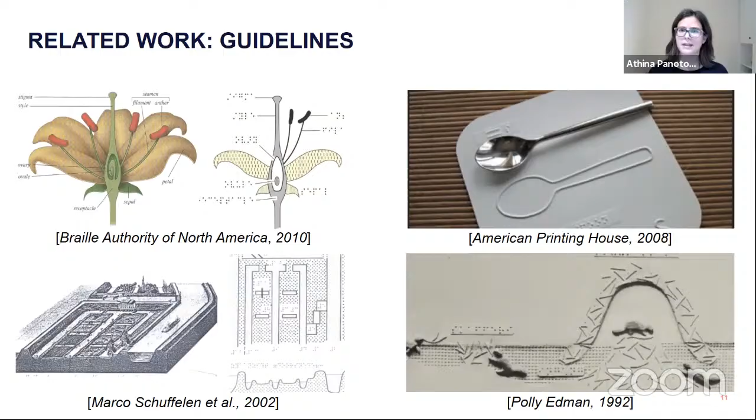So just to give you an idea, one of these documents is published by the Braille Authority of North America, or BANA, and we used it to design the baseline images for our test study. And here you see an example of the image designed following BANA guidelines. So the left is the original image and the right is the corresponding tactile illustration. And I will discuss 2 elements that are different between BANA and our design.

So first, BANA suggests the use of semantic uniform texture. So one semantic area, the sepals, have one texture, while the petals have a different texture. In contrast to that, we indicate geometry with textures. Second, BANA suggests the use of one or more images taken from canonical viewpoints.

This image is a canonical cross view, while the original image is a non-canonical view. So in this case, the eye level is not at the same level as the object level. In contrast to this, we design a single image which is a combination of multiple canonical views. And this is called multi-projection rendering.

So closing the background material, I want to clarify that we present a semi-automatic way for a new design of tactile images made of laser-cut microcapsule paper and a user study that tests these images in terms of shape understanding. So first we ran 2 formative studies.

With the first one, we tried to identify important information on shapes for the blind, while with the second, which I will discuss now, we identified common misconceptions on current illustration design. We gave 3D printed objects to 7 participants and 3 variations of illustrations. The first variation was taken from non-canonical or 3/4 views, the second one from canonicals, while in the third one, texture was added. And after that, we asked participants questions about the shape. For example, how many pieces has the back of the chair?

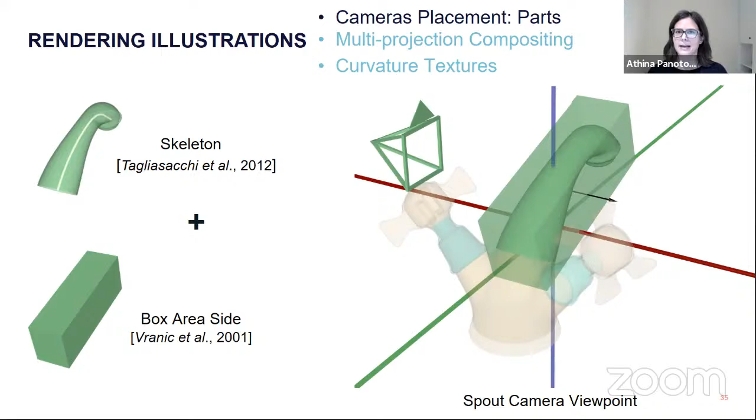The next step places the rest of the cameras, called part cameras, because each camera renders a single part. Here we have 6 part cameras, 6 parts. I will focus on the spout. From the user studies, we know that canonical views of large surface area are preferable. So we take into consideration the skeleton and the surface area of the canonical face of the bounding box. And this gives us the image here. We repeat the same process for all cameras. And this is the camera placement for the faucet. You see on the corresponding canonical views that the parts are displayed clearly.

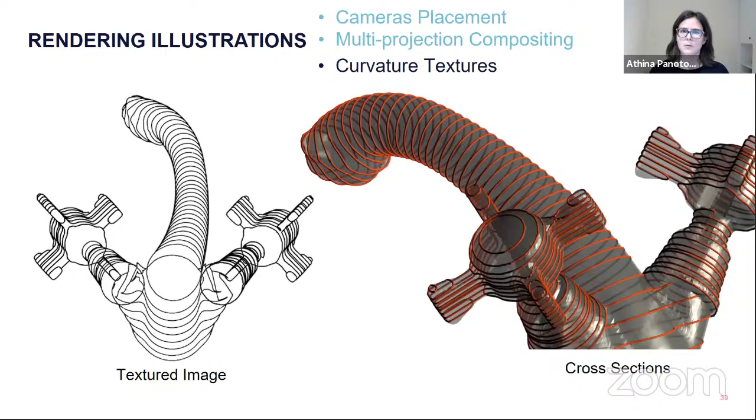We then align the views with the master camera, following the information from the master camera, and we combine all the images together in a multi-projection drawing that you see on the right. From the studies again, we found that curvature could be indicated with lines. So we create a curvature-based texture from extracted cross-sections of the shape. And you see the textures here. So we extract for each part a texture, and after we post-process the image to make it more easily perceptible, following BANA guidelines. Then we test our design.

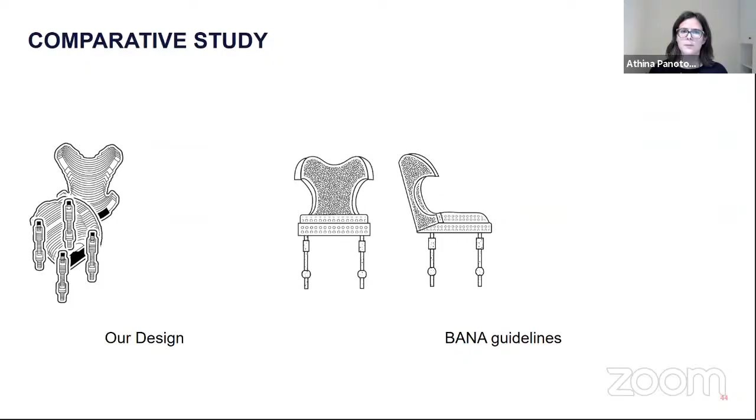We then repeat the same thing for all objects, and we consider the answer correct when the participant chooses the correct object. And after, we repeat the same exact process with the other type of images, the baseline images following BANA guidelines.

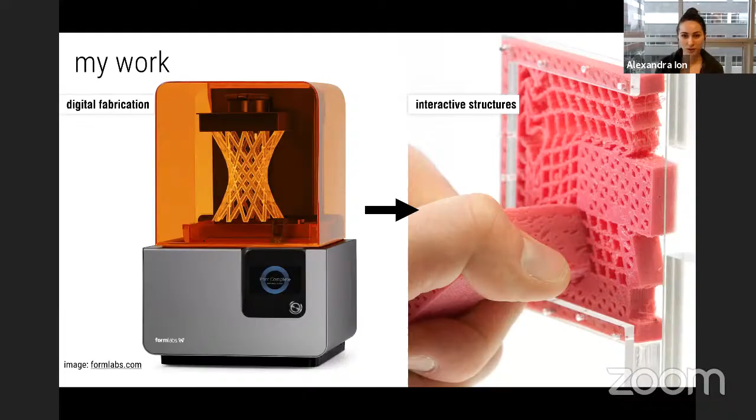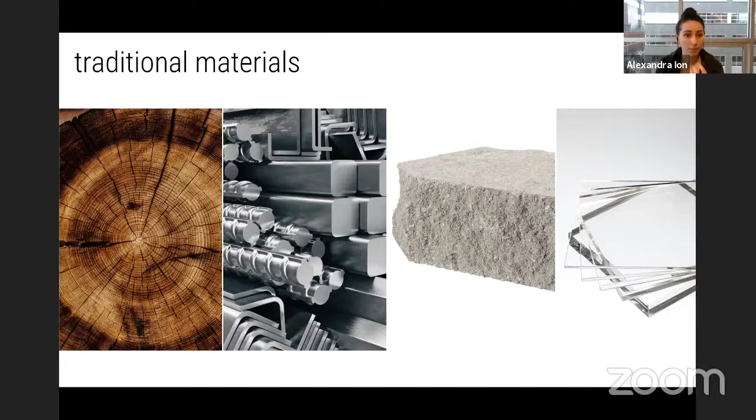So why do we do that? If you think of traditional materials, you can think of wood or metals, stones, glass, whatever. Mostly you use the materials to build something, you assemble things, they're structural. Now, if you want to have a little more functionality, you might think of starting to composite things together, like glue soft materials on top of rigid materials for safety in this example.

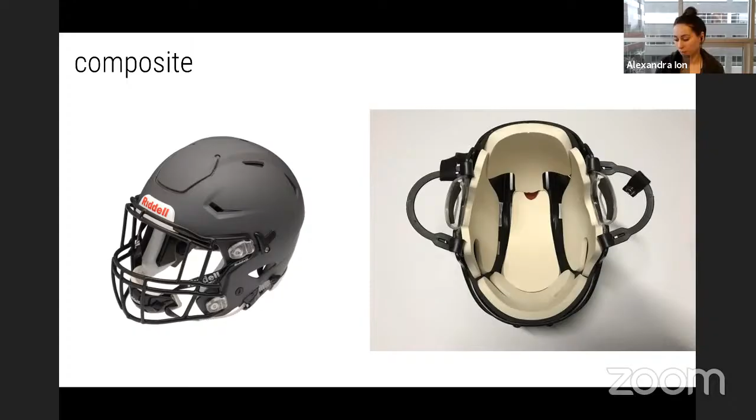Now, if you zoom into those very common materials that every one of us knows, right? Rubber foam, it's very common. If you really look very closely, you can also see it just with your eyes. You see that there's this open cell structure, which comes from air enclosures, just as the manufacturing process of these materials. But what you can think of is that these are a lot of beams that are

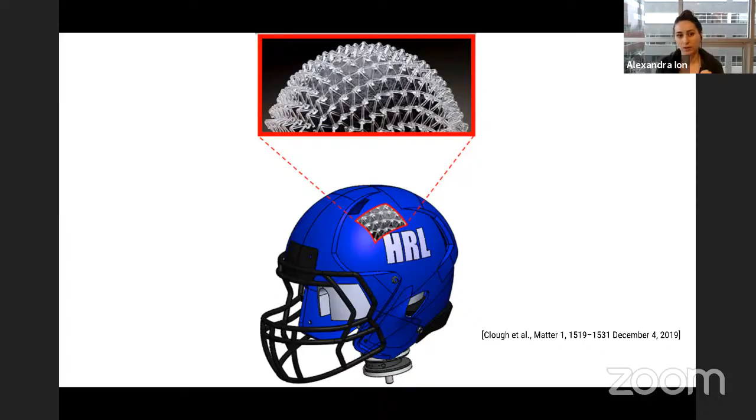This lattice assembly is very structured, very intentional in how these beams are oriented in order to provide better safety and better shock absorption. Now, taking this concept, you can go way further. You can create materials that are ultra lightweight, as you see in the dandelion example, that are noise canceling just by changing their geometry, that are light absorbing.

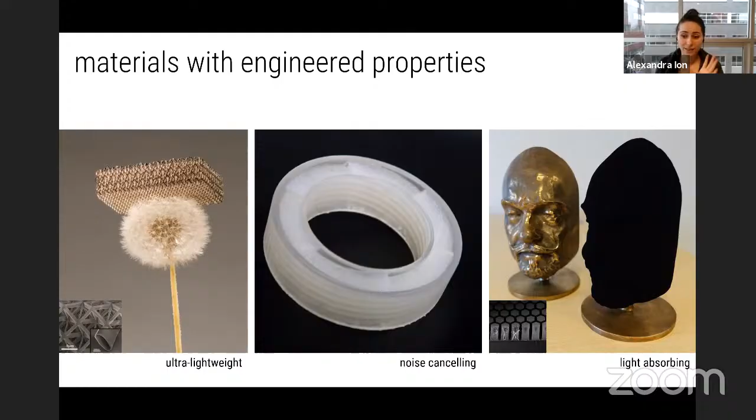And this paint is called Vantablack. Some of you might have seen this video, but I find it so fascinating that just by manipulating the structure of the material, it absorbs almost 100% of light. I believe it's 99.7%. So I find this very captivating. And the unifying theme here really is that all of this is made possible by carefully arranging the structure, so the geometry of the materials.

Now, there's also really interesting and fantastic work, for example, by Christian Schumacher, where they looked at optimizing for localized elasticity throughout 3D objects, or even looked at manipulating the directional stiffness by creating the geometry that achieves that. So there are also a lot of more interesting examples. So if you see this material, for example,

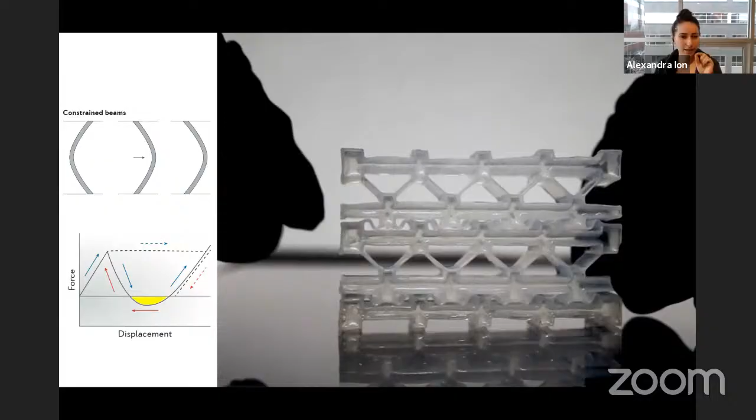the egg on the right breaks, but the one on the left doesn't. And that again is enabled by the structure of this material. So essentially what you have here is a bistable structure that flips over to its second state. And then as it goes into the second state, there is a little area that people call negative stiffness, and that area traps energy. And this energy is absorbed from the falling egg, which is why it doesn't break.

So all of these examples that I just showed you, well, I started with the broader range of metamaterials, but we will focus on mechanical metamaterials, which are artificial structures with unusual properties that originate in their geometry rather than in the material that they're made of. Now, this is also true for other types of metamaterials like optical metamaterials or electromagnetic metamaterials, but we'll focus on the mechanical ones for the sake of this talk.

Now, one thing that you might also have noticed is that most of these materials were really treated as materials. Traditionally, materials have been understood as materials. And what I think makes my work a little bit different is that I really think of them as devices. What can these structures offer us in terms of adding functionality, not changing the material properties per se?

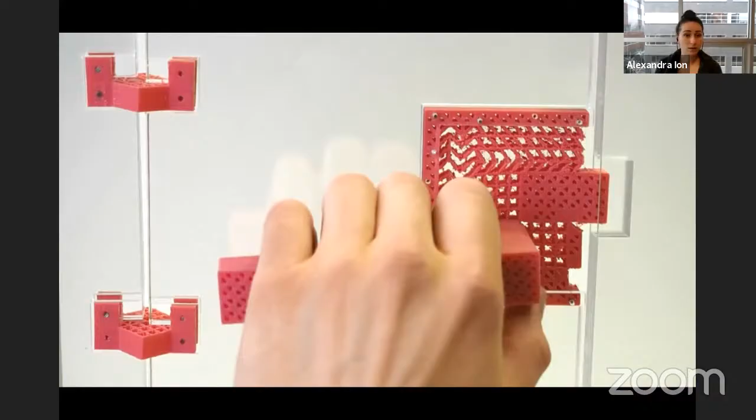So the first thing that we looked at was processing analog information, which you can think of as something that transforms the input into something else. Mechanisms do exactly that. They transform the input into some other set of output forces or movement. So you see in this door latch example that as the user is pushing down the handle, it creates a rotation which causes these cells to shear, and they move the latch inwards. And that is how this whole mechanism works.

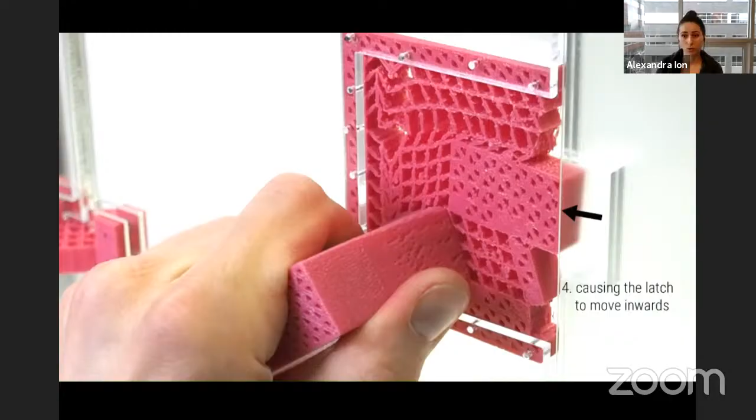So essentially, we have a grid of cells, and each of those cells, this is the vocabulary that we defined for this project, can have this topology. Rigid cells do have diagonals, whereas shearing cells don't. And this combination allows for a very controlled directional movement.

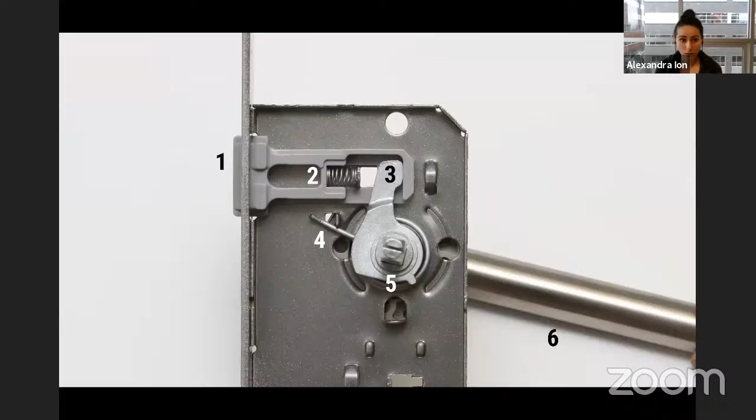So this is how a traditional door latch looks. What I want to point out is that it consists of a lot of different parts, including springs, which are kind of tough to assemble.

Now, one of the main benefits of our approach in this case is that it only consists of one piece, which means that there's no assembly, and because there's no assembly, you can create this as a part of a larger structure. You could print the entire door, including the door latch, for example.

The second obvious benefit is that in mechanism design, essentially you have the design phase, which is also very tricky, and then you have the craft phase where you have to assemble everything. That craft phase is offloaded to the 3D printer in this case.

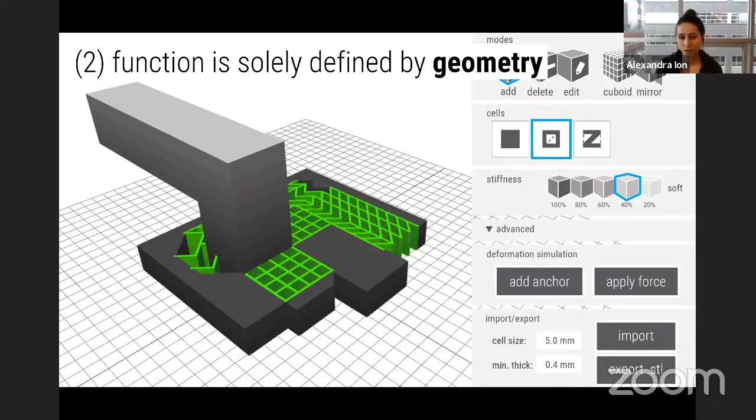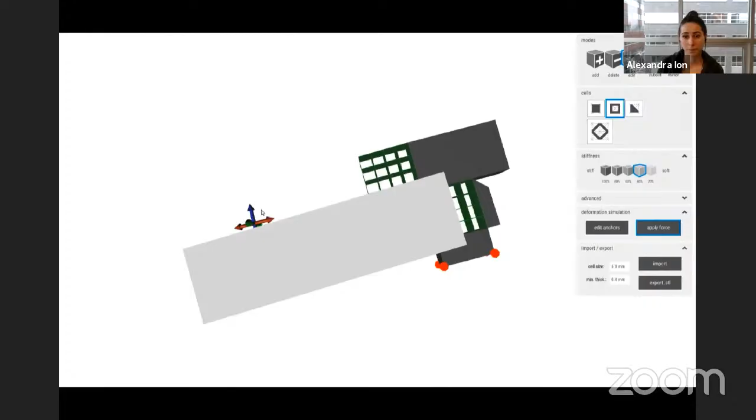For the design phase, we can assist users by creating very easy to access online design tools where users have simple interactions and can do a tight design loop by also simulating their designs to see if they met their objectives. While most of the examples that I showed so far are 2D or 2.5D, there's no reason for not going 3D. Our editor actually fully supports that.

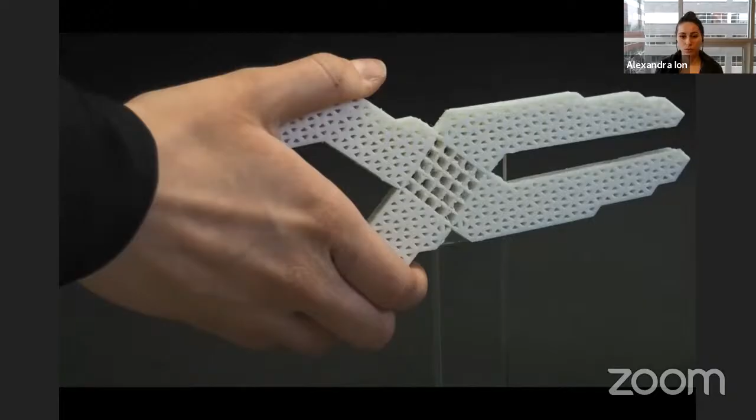Now, what else can we do than door latches? Here you can see pliers that are strong enough to lift things or tighten screws or things like that.

This is actually my favorite example because it's somewhat unclear what it is. It's like a strip of material with some strange structure. But what it does is that it's kind of a copy machine, if you will. There are two pencils embedded, and the pencil in the middle scales down your drawing as you draw.

And lastly, we also created this prototype of a Jansen walker to showcase that you can create robotic movement out of one piece with these types of structures.

All right. Now we've seen a couple of applications, and applications means that you don't only have the structures, but the whole embedding: there's a door around it, it serves some purpose. But if we take all of that away and just focus on the essence of what these mechanisms actually are, they are transformations.

So we only look at the motion paths, from where the input is, where the user pushes down the handle, to where the output is, in this case the latch moving inwards. Now, it turns out that even though the vocabulary is very simple, essentially a quadratic cell that either has a diagonal or not, the design is still somewhat hard.

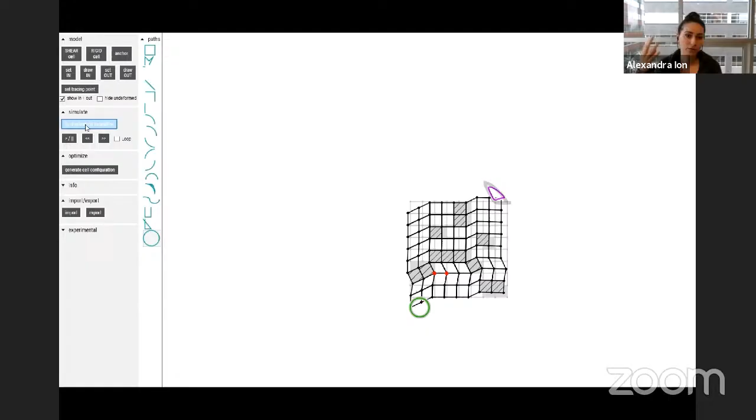That is why we created an inverse design tool where users specify the grid size and the movement, and draw a custom movement. Our algorithm then returns the cell assignment that best approximates the transformation of the one motion path into the other motion path.

What the algorithm does here essentially is take as input the grid size and the paths that the user defined. Then we analytically define some anchors out of the set of vertices that we have. What we actually optimize for is the assignment of either a shearing cell or a rigid cell that best minimizes the distances between the user-defined paths and the paths that result from the current cell assignment of the current mechanism.

Now, you might have noticed that we are still talking about these very distinct cell types, a rigid cell or a shearing cell. Because we have this binary assignment of cells, we have a very large search space, and we are bound to combinatorial optimization. So the question is, how can we best model this design space to find out what is meaningful to look at?

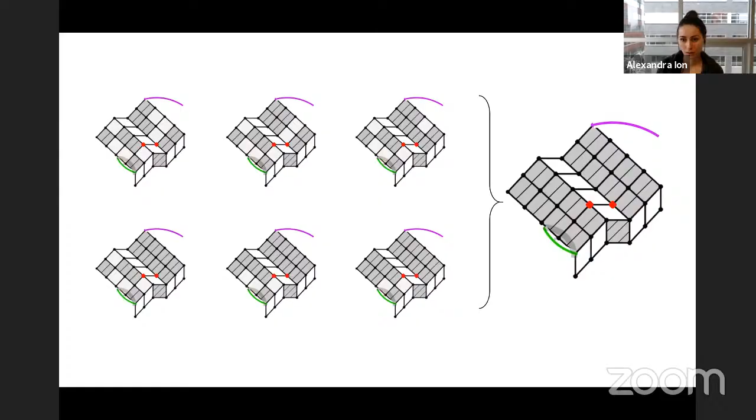I would like to state right away that not all of the possible cell assignments are meaningful, because all of these examples, if you look at the transformations between the paths, implement the same transformations, and thereby are the same mechanism.

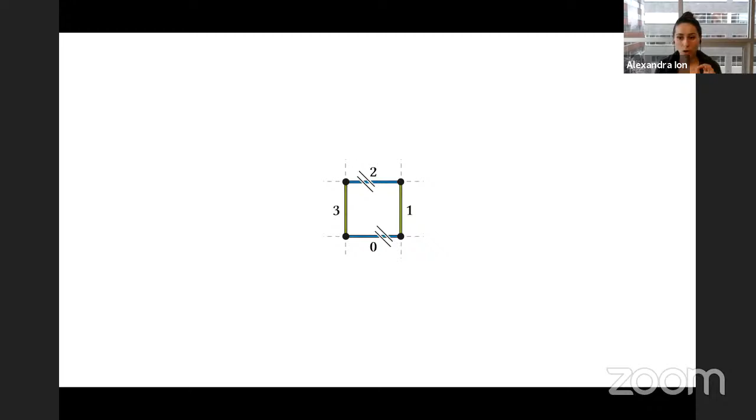So knowing that, we can move forward, and this is kind of like the search space reduction that we were looking at. We identify these distinct mechanisms by modeling the structural constraints. So we create a constraint graph. Looking at just a single cell, we know that in the shearing cells, the opposing members always stay parallel. And so we model that in the graph, where the arc is the parallelism constraint and the nodes in the graph are the edges in the cell.

And so you see that we get two connected components for just one single cell, which models the different degrees of freedom that this cell has. Whereas if we look at the rigid cell, it has exactly the same constraints. So the opposing members still remain parallel, but additionally the angles of adjacent edges can't change.

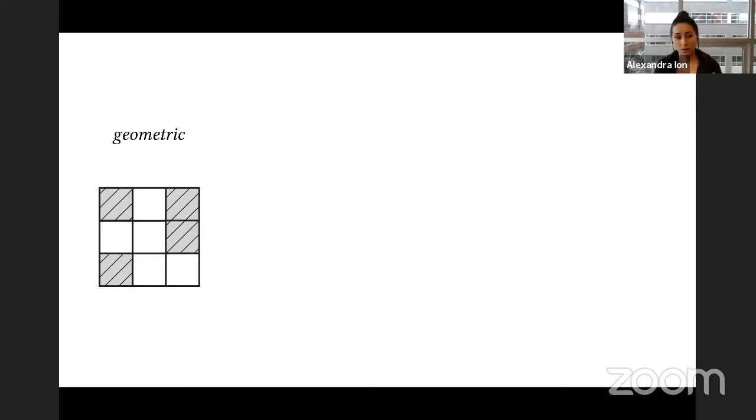So essentially, before we go into the optimization, we convert the cell assignments that we have from the geometric space into this constraint graph, by just propagating the constraints throughout the graph. And here we already see something interesting: these blue highlighted cells are in the same connected component, which means that they are really constrained by their neighbors. In theory they would be allowed to change their angle, but they cannot because the neighbors prevent them from that. And so we know that these two cell assignments are really the same mechanism.

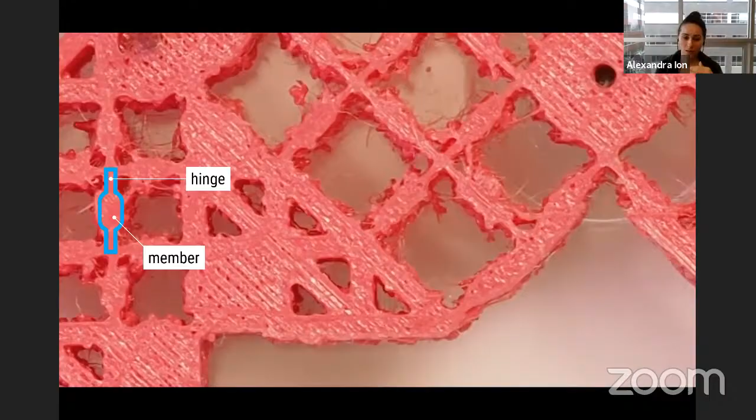Now, this thickness ratio gives us a stiffness ratio, because even though the member is thicker, as it pushes the next cell over, it will still deform a little bit, and that is where this decay comes from. Now, if we just double this thickness ratio, which we could do by essentially throwing technology at the problem.

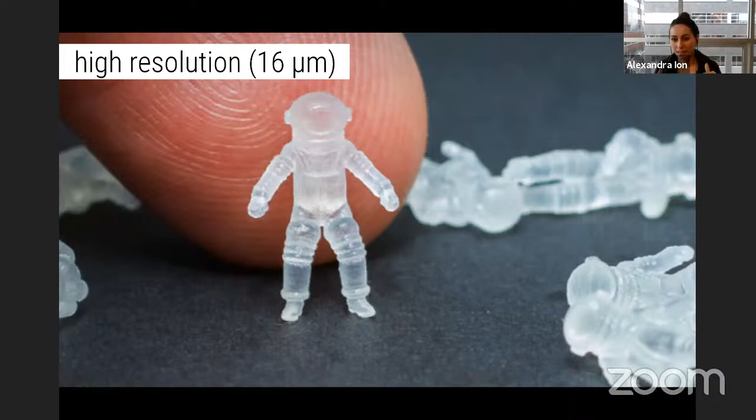So using higher resolution printers or multi-material printers, where the corners could be soft and the members could be rigid material, that would already give us a pretty good stiffness ratio. Just doubling the thickness ratio, we would get a stiffness ratio of 64:1. Thereby, we can concatenate more cells and create more complex machines.

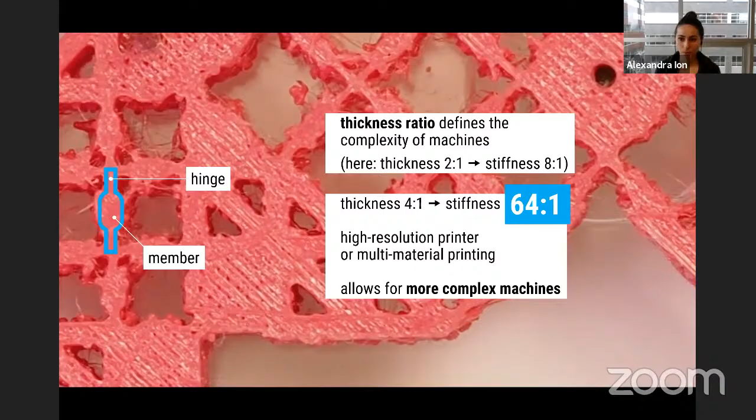However, even though 64:1 might sound really good, you just cannot get rid of this decay ever. That is just how analog machines work. So obviously, the next logical step is going from analog to digital, because there you don't have this problem of signal decay. To explore the space of what digital materials would look like, we created these other types of cells, which contain bistable springs, similar to the ones that you've seen in this egg example.

So they do have two stable states, this one and then this one that they're printed in. As you push in the leftmost cell, that snaps through to the other side and releases its own energy that it had stored. Remember the egg? The energy that it absorbed from the egg is stored in the spring. So it releases the energy, pushes the next cell, that also releases its own energy, which pushes the next cell, and so on.

And because at each and every one of these steps you do have energy stored, you don't have energy decay, because they are just triggered, but the force is not propagated. They're just triggered, and then they release their own energy. So here it is in real time, where you see how this signal progresses through the whole cells in this case.

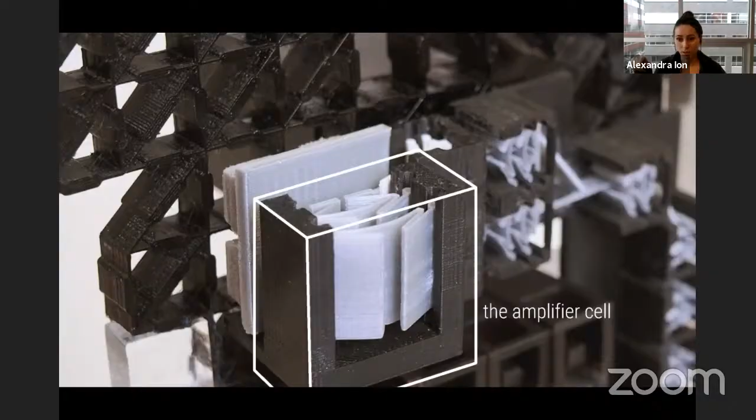And to embed this in some sort of usage scenario, we created this little lock where the user inputs a code at the beginning, and only if that's correct will the signal traverse to the very top, where it retracts those bolts that were blocking the door from opening. So you see that we already combined the mechanism part with the digital parts into one example here.

So there are different things that you can do, like route the signal. Obviously, you will need that, but then also create gates. And we did model all of the important gates, most importantly the NAND gate. So we cover combinational logic, and it's also time-independent logic, which makes the current scope of this project a combinational circuit.

Obviously, for the future, you would like to move up to sequential circuits, where you would want to have a clock signal. This is still a limitation in the current state of this project. And while there are also other people working on this type of mechanical computation in the meantime, there's still this problem of how you reset the springs back to their charged position where they store that energy, so you can do another computation step or configuration step, depending on how you want to use this.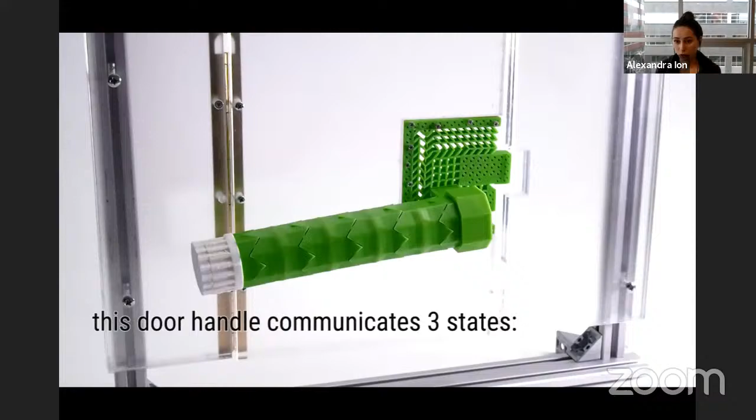So one way we approach this is looking at them as textures, where this door handle has multiple textures integrated into its structure, so it can communicate states like, well, I'm available, or as you move forward, you could be busy, or spiky means, please really do not enter, I have something super urgent to do.

And how we achieve that is that a global force folds all of these cells, but there's a defined sequence to them. So first you can set it to go into this rippled state, which means, well, I'm kind of busy, but you can come in. And then only second, as you keep actuating this door handle, it goes to that spiky state. So thereby you can choose the states, but they are adding up onto each other, as you see here. But you can dynamically traverse through these integrated textures in the material.

Now here you see a different example of how thinking about the output of these types of metamaterials is useful, as you can, for example, not communicate to the user as the previous example did, but change properties dynamically, such as friction in this case. And one important aspect here was for me to also keep the user interaction in mind. Like, how do you change the state of your material?

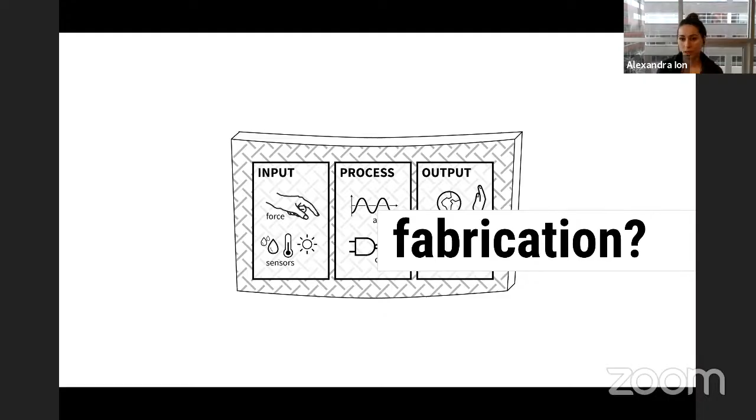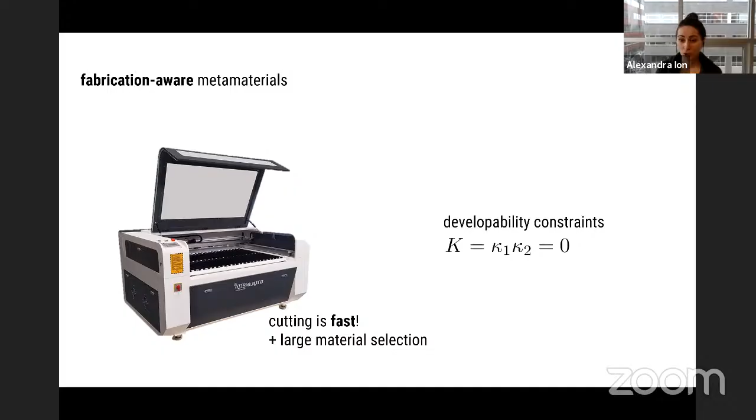Now, in developable surfaces, which is a very established but still very thriving research discipline, people mostly look at recreating, approximating the 3D shape with surfaces. So at the same time, I was wondering, why not the volume? I mean, the surface is cool and all, but why not the volume?

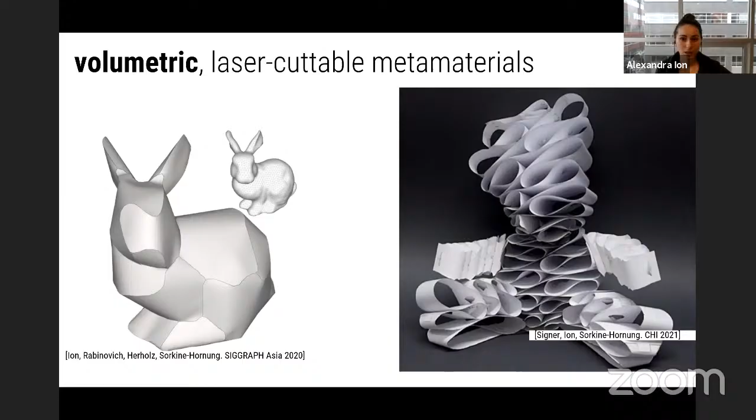So we came up with this different type of metamaterial cell, if you will, where if you look at paper, which has a very low bending stiffness, just by curving it up, you get, due to bending energy, a higher stiffness. So essentially, this thing that you see here on the screen became our new unit cell. So you might notice that this unit cell looks very different than the unit cells you've seen previously.

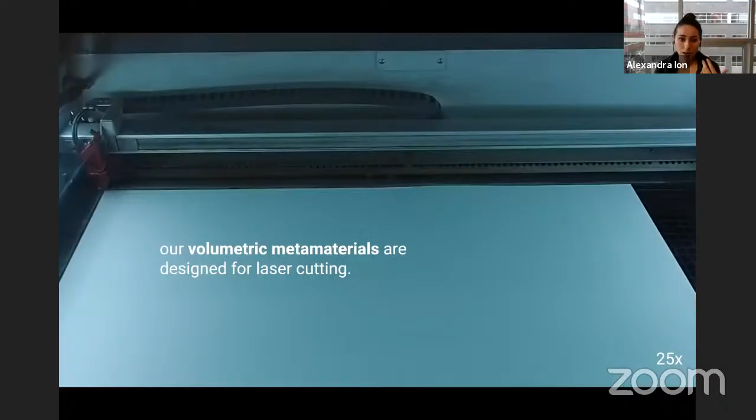But that is exactly also the point of this work, that if we want to design for different types of technology, then they might just look very different. So what these cells allow us to do essentially is, by changing the density of these ruffles, you also change the elasticity of the object locally. And also, obviously, they're very fast and easy to make.

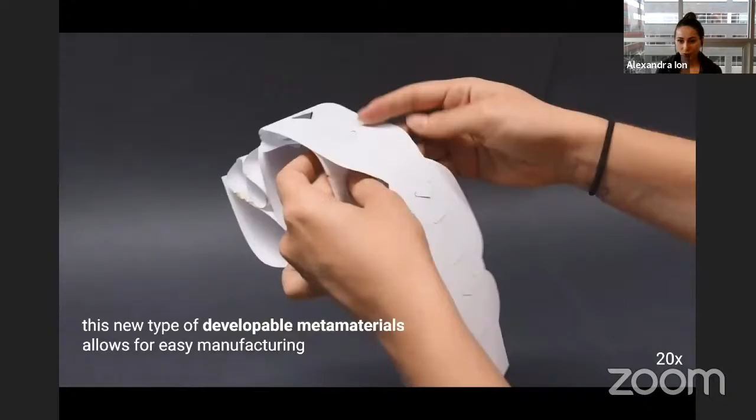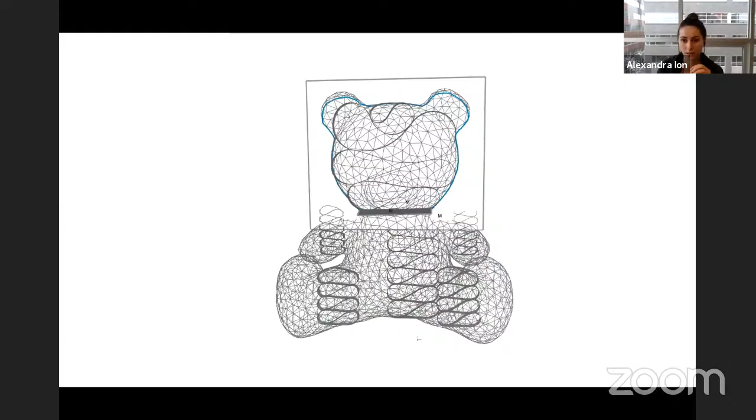The connectors already come with the strip of paper. You just fold them in, and that was that. You don't even need external fasteners. So to get there, we implemented an optimization tool, where in this case we use a cutting plane and then approximate that ruffle stack to approximate the 2D shape. And then essentially we just extrude it to fill the volume of the object that we just optimized it for.

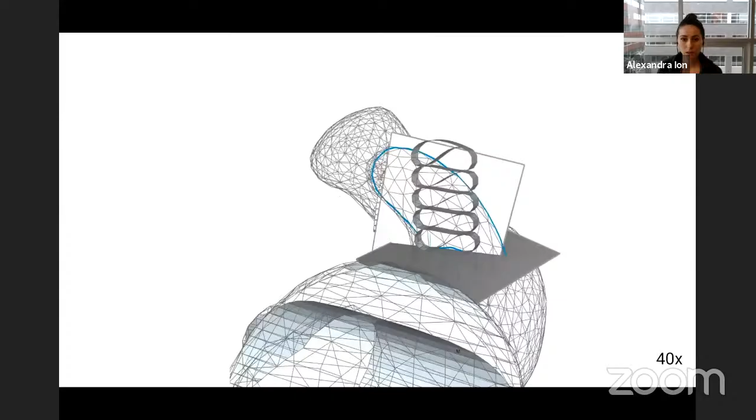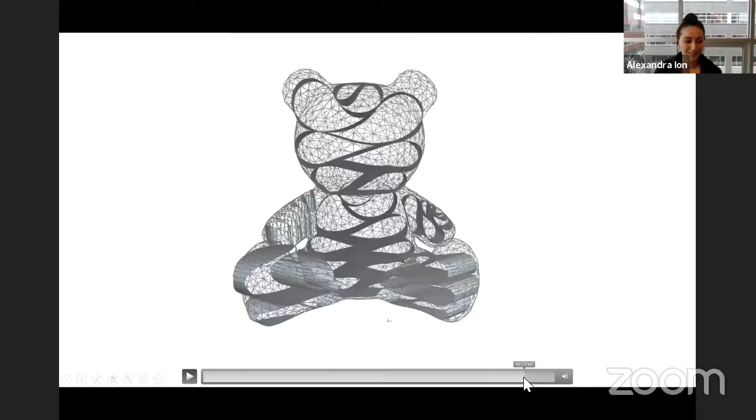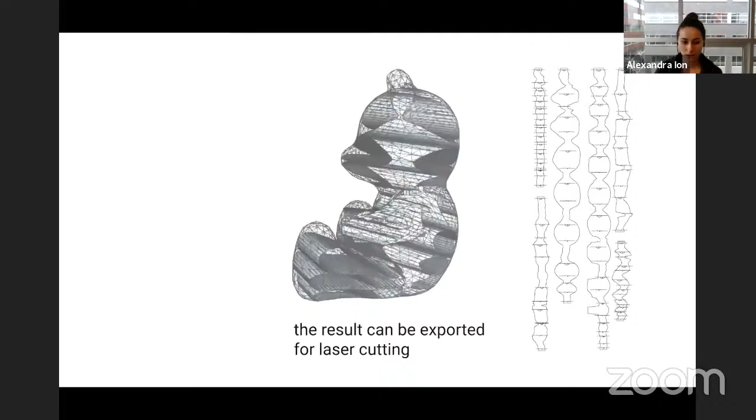So in this case, the teddy kind of has all of its torso and limbs and head made from single ruffles. And then, oopsie, let me see. Well, and then we export those ruffles in a flat state, obviously, to be laser cut by the user. So this is the teddy in real life. So you see nothing collapses. And it's very, very springy.

Now, the way we do that is that we have two optimizations going on. One is the inner loop, the ruffle simulation, where we want each ruffle to deform smoothly. We base that algorithm on discrete shells. Then the connections of the ruffles should also meet in a smooth manner, which essentially means that their tangents should be the same. And then there should be, of course, no self-intersection. And to achieve that, we extend air meshes. And then we sum up all the energies and use LBFGS to find a minimizer.

And then in the second step, the outer loop, we look at where we are with the current ruffles that are close to physically correctly simulated. And then only the outer parts, the more coarsely dashed lines. For those sections, we look at how far we are from the target shape. If we're inside the shape, then we extend that portion and re-simulate again and do that iteratively. And if we're outside of the shape, then we reduce the length of that section. So we push it back in order to approximate that shape.

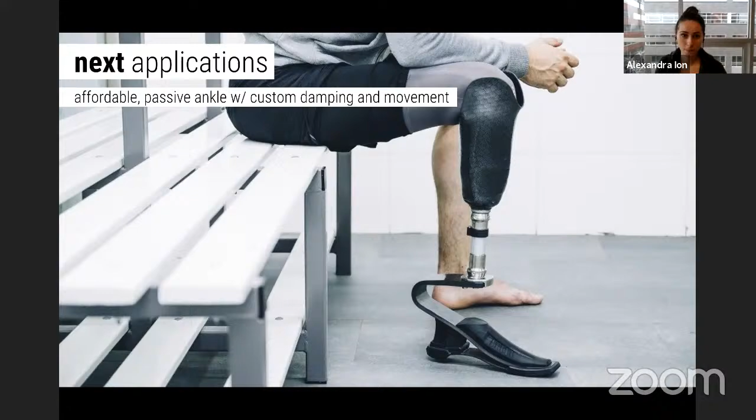And then back to this notion of mass fabrication and real-world impact, which was the motivation of this work. Okay, we looked at laser cutting, metamaterials. What are the next fabrication methods that we could look at? Molding 3-dimensional lattices, that's difficult, but interesting. Can we do stamping, thermoforming? There's a long list of fabrication methods, and which ones are most beneficial for metamaterials, and how can we create geometry that respects the constraints of these fabrication methods?

And then lastly, you can also think of, what about weaving? There are a lot of composite materials made by weaving that are ultra strong and so on. So these are material properties that are interesting for us. Can we create geometries that can use those types of materials as well?

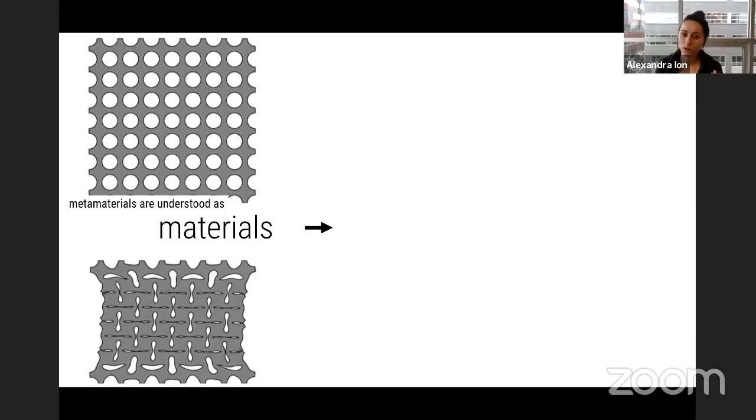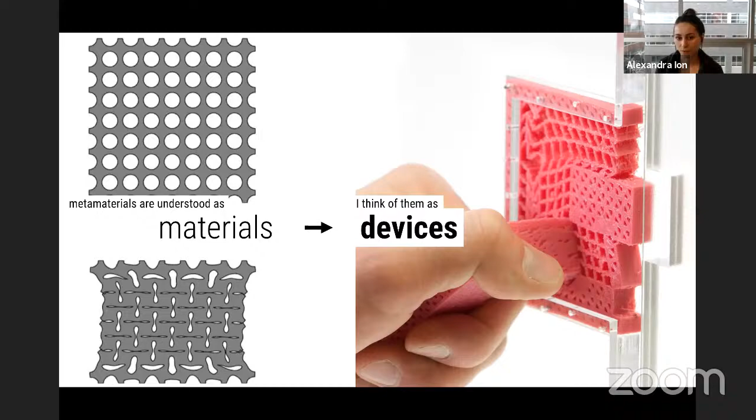So to conclude, what I've essentially talked about was that metamaterials are understood as materials, but I think we can use these complex geometries and think further and think of them as devices, and then also try to integrate those types of functions that you need for devices. So why do we want to do that? Well, there's a couple of benefits that are just in general there for metamaterials, and then obviously would also translate to these devices.

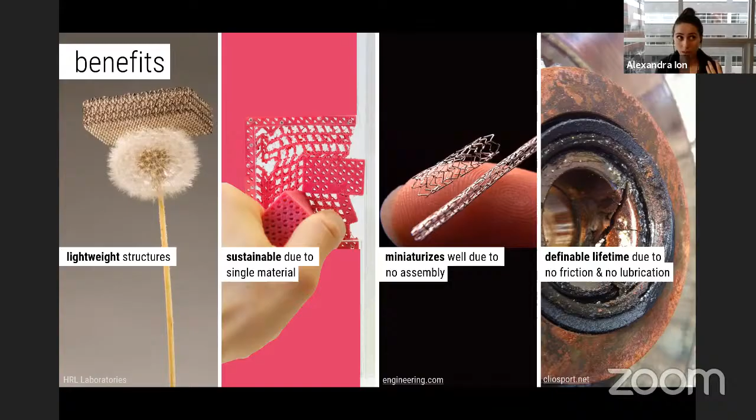So they could be ultra lightweight. You can make them from one single material, therefore more sustainable to dispose. They miniaturize very well, which can also have medical implants or applications like that. And then also they have a definable lifetime, I would say, because there's no parts where dirt can be caught on. So you could actually compute how long that material will last because it only flexes, but it doesn't have many external factors that would influence its lifetime.

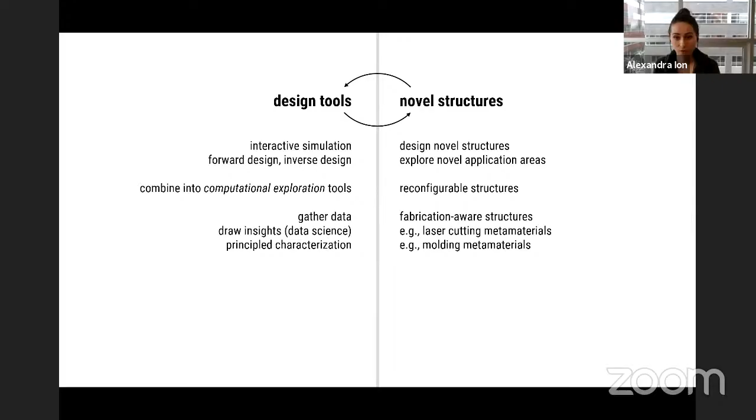So to get there, well, I see this kind of from an HCI perspective. As you've noticed, I do care about applications and what we do with that, but obviously we need to have robust algorithms that create those complex geometries. Engineering is a big part of getting closer to this reality, and of course design. So I think I will just skip over this. Just know that if we have novel structures, we need to have a way to compute that geometry. As we have more capability of creating geometry, we'll have more ideas for novel structures, and I think that they will always influence each other.